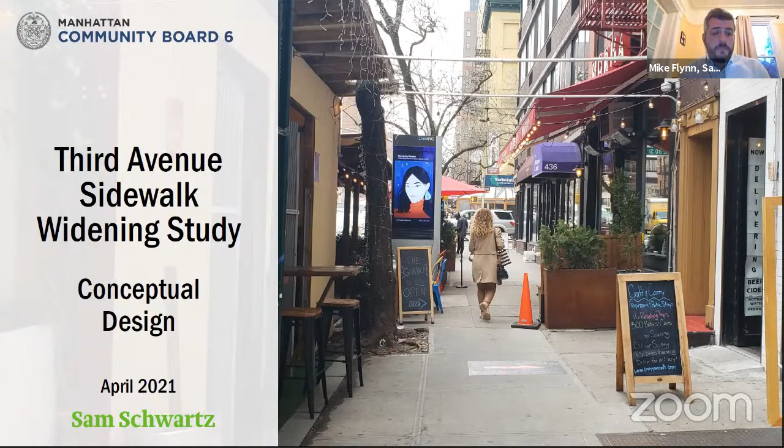Just as a quick introduction, my name is Mike Flynn. I'm a principal at Sam Schwartz and I lead our transportation planning work. Lian's a senior planner on our team and was the project manager for this, and I was the project director. We're excited to be supporting the community board with this study, and we definitely see a lot of potential on this section of 3rd Avenue.

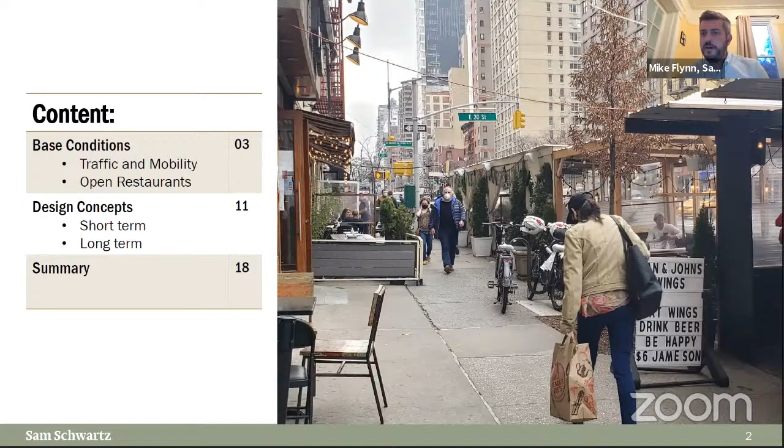So we're going to step through the existing conditions and then into some of the design concepts that we explored. At the end, we'll give a summary of all that. I just want to mention before I turn it over to Lian that the concepts we're presenting are preliminary. This wasn't a full scale traffic study, but we feel pretty confident in the ideas we're putting forward here for discussion based on the data that's out there. So I'll turn it over to Lian to walk us through it.

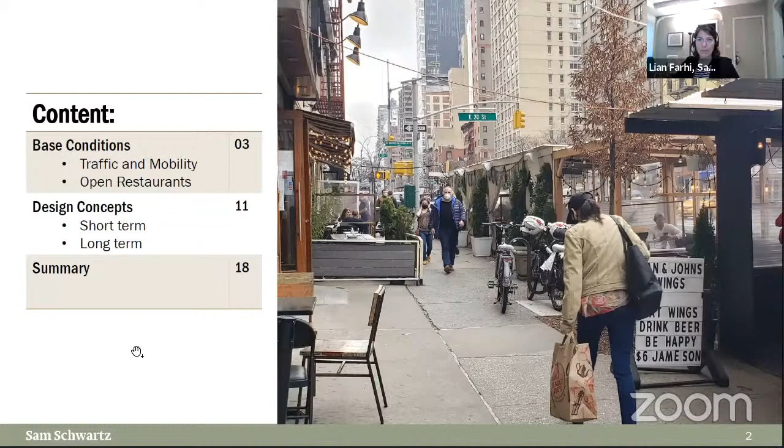Thank you, Mike. So I'm going to start with a base condition, and I'm sorry about the background noise, hope you can hear me well. We studied 26th to 32nd Street. We're looking at a right-of-way of 100 feet with a roadway width of 70 feet. I'm sure you're very familiar with the corridor.

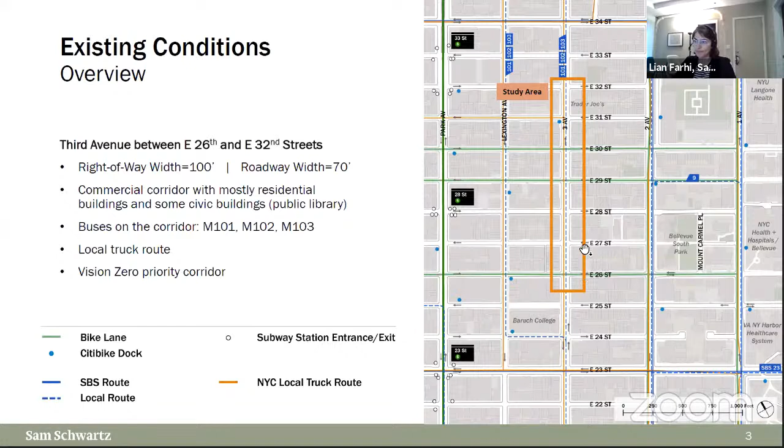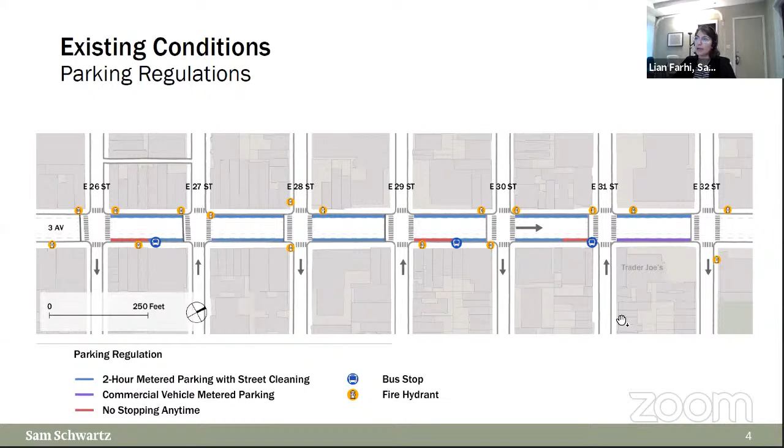This is a commercial corridor with mostly residential buildings and some civic buildings like the public library. The corridor sees 3 bus routes, and it's also a local truck route, designated as a Vision Zero priority corridor. In terms of parking regulation, most of the study area is 2-hour metered parking with some time for street cleaning. We have a commercial designation area next to the Trader Joe's, and we have areas that are no stopping anytime around the bus stops.

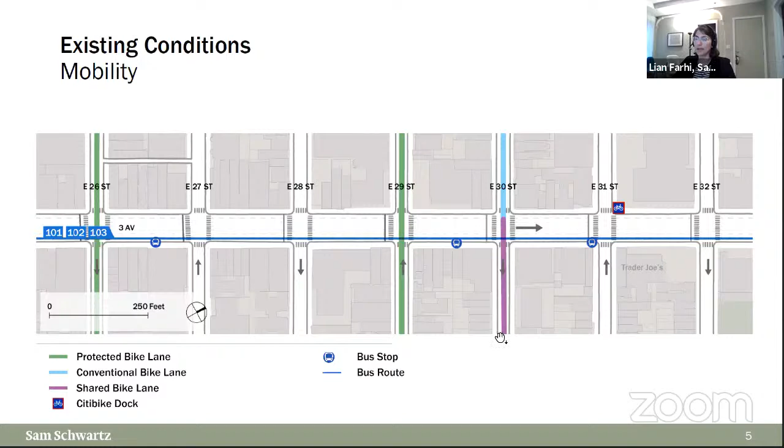We also have some crosstown protected bike lanes on 29th and 26th, the pair, and another bike lane on 30th Street. When we went out there back in March, we saw 23 restaurants and bars that are using the Open Restaurants program in this area between 26th and 28th, and then between 29th and 31st.

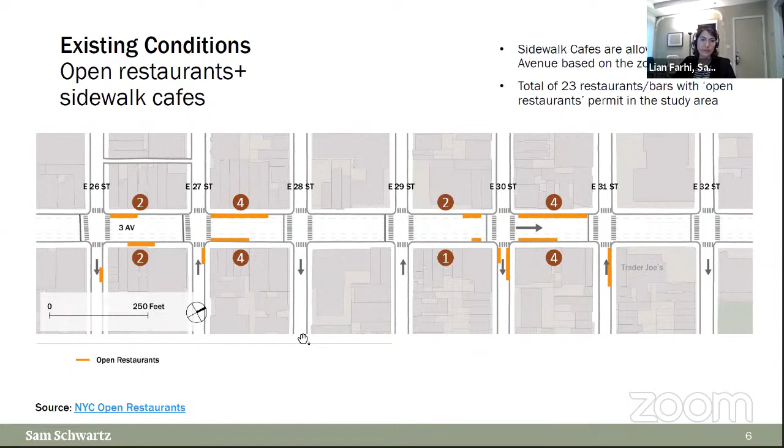I'll show you some photos of our site observation. I'm sure you've seen it on the site itself. We see it's been very popular. At some locations, we see some conflict points between the north-south movement of pedestrians that are walking and the east-west cross movement of the restaurants and bars. This suggests there might be a need for additional pedestrian space on this corridor and potential for expansion of this activity.

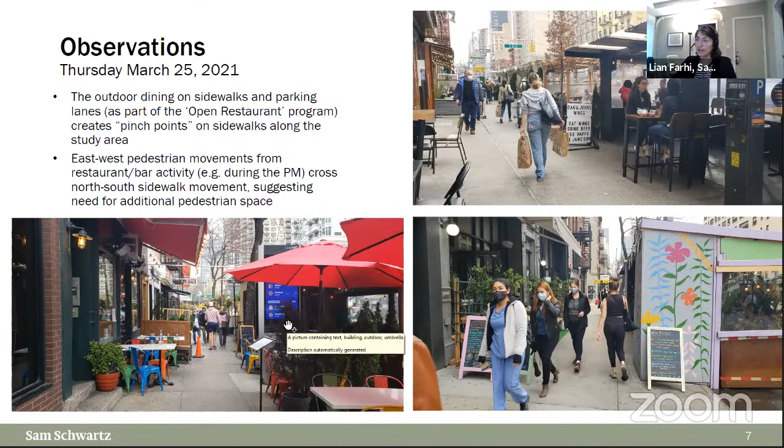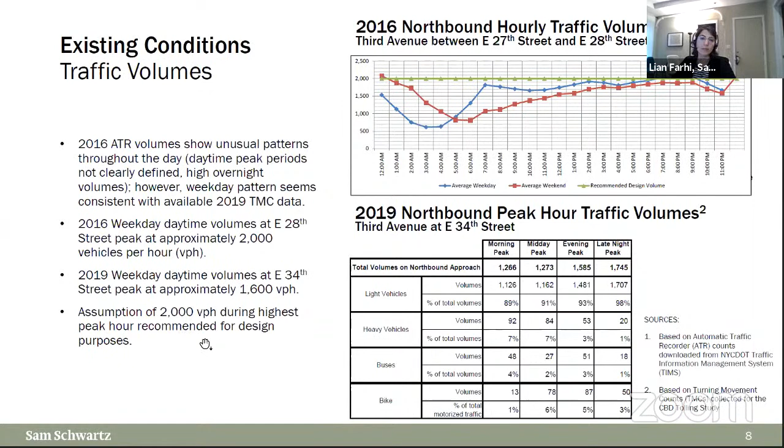We also looked at the available traffic data done by DOT in the past. Data from 2016 show the trend you can see here on the screen. It's a little non-conventional pattern of traffic that we see here, but around midday we see a peak of 2,000 vehicles per hour. Data from 2019 show slightly lower volumes, but we went with 2,000 vehicles per hour during the highest peak hour as the baseline for this design.

From the pedestrian volume information we have from 34th Street, a bit north of the corridor, we're seeing over 2,000 pedestrians on 3rd Avenue during the peak hour, which is in the PM.

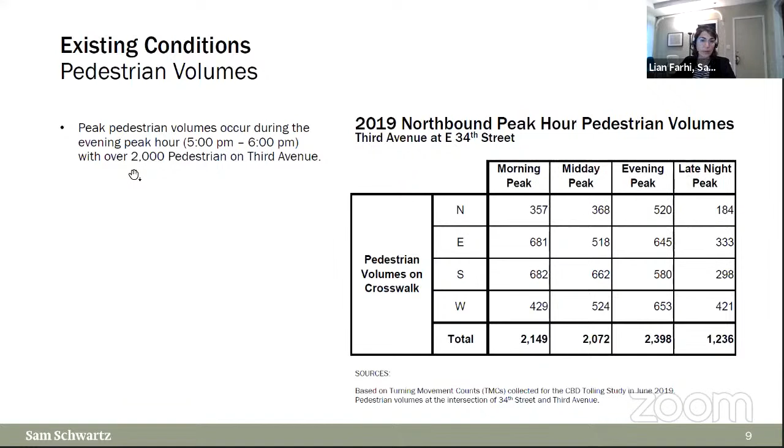With this information, we started to look at what are the potentials and what are some concepts that we can explore.

So this is the existing cross-section. You can see here sidewalks width of 15 feet, parking lane of 8 feet, and then 5 travel lanes of 10 feet. On this side, we have parking, loading, and bus stop of 12 feet, and another 15 feet on the east sidewalk.

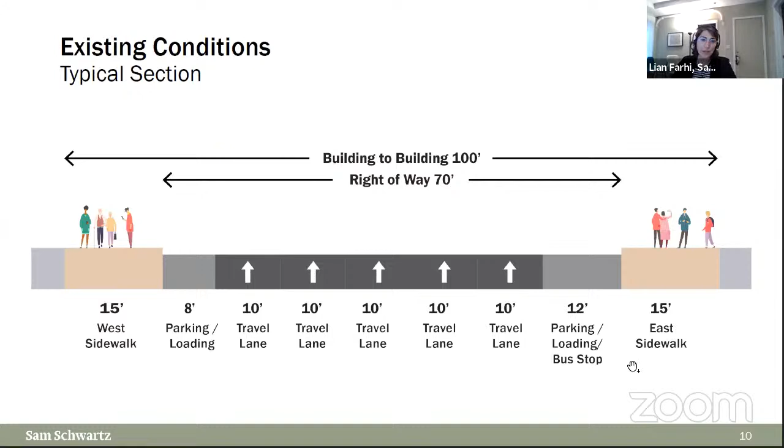I'm going to go through a few ideas, a few concepts, and let's start. So looking at long-term, what are we thinking? We see a potential for reducing the traffic travel lanes from 5 to 2 travel lanes, keeping 2 parking lanes, and on the east side to accommodate the buses.

We're introducing a protected bike lane. Here it's with a buffer. It could also be a raised bike lane design. And what we can gain from doing that is sidewalk widening of 10 feet on each side. So this is a long-term vision for the corridor.

Thinking short-term, and kind of taking what we have already on site and how to improve that, we're looking at sidewalk expansion of actually 13 feet on each side with, again, 2 moving lanes and 13 feet on the west side for a curb lane, a little wider to accommodate bikers, and 11 feet on the east side for the bus stops.

I want to show a conceptual plan for how it would work on a typical block. So I'll try to walk you through here. In purple, you see the area for the sidewalk expansion, and then you're going to see the parking lane, 2 moving lanes, another parking lane, and sidewalk expansion.

The idea would be that on the existing sidewalk, you'll have the opportunity to accommodate outdoor dining, a furniture zone, some more amenities for pedestrians. The circulation would be on the expansion of the sidewalk. We also added these mid-block ramps for accessibility and ADA.

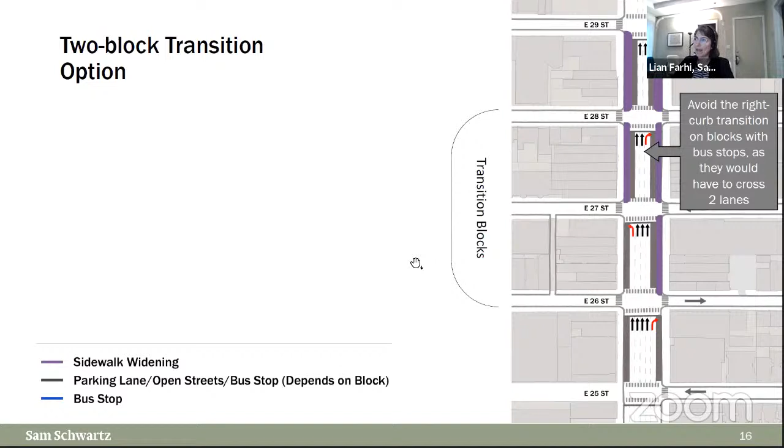We want to raise another option, which is actually starting this transition from 24th Street. The reasoning is that this block between 24th and 23rd is two-way traffic. We only have 3 northbound lanes here, so the transition is much smoother.

We also see a potential of connection to the new Baruch Plaza here. So it's combining the improvement on the plaza to a sidewalk widening and expansion of public space.

With that, I'm going to give it back to Mike.

Sure, so I'll summarize and then we're happy to answer some questions. I saw one question, or actually I see another one now as well, so we can answer. No, okay, sorry, I'm not sure what the format is. We'll call on committee members first, Mike, and then we'll deal with the stuff in the Q&A. Got it, okay, thank you.

Okay, so yeah, just to recap, this kind of worst case scenario, or peak volume of 2,000 vehicles, we feel can be accommodated in 2 travel lanes. You'd want to look a little closer at specific turning movements and things like that, whether maybe turn lanes might be needed at certain intersections. We also assume on projects like this, based on past experience, that if you reduce the capacity on a road, some of that traffic will divert to other routes or just kind of evaporate, basically.

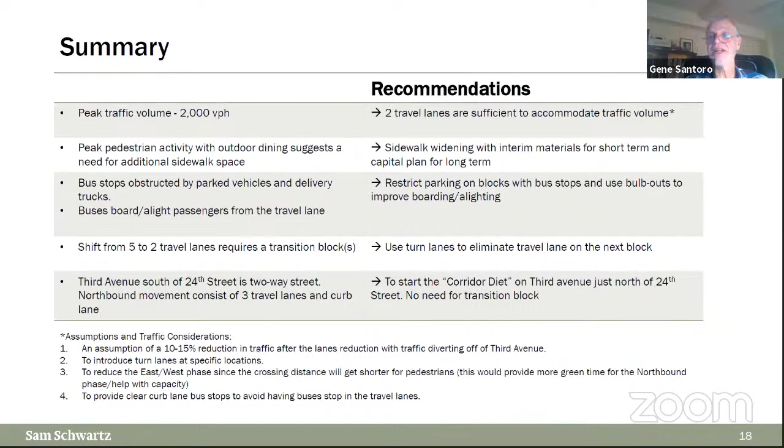Ronnie? Yes, good evening everyone. Just a quick comment and question. In general, I love this, this is fantastic, and it definitely should start from 24th Street. The traffic turning onto Third Avenue and coming up north on Third Avenue will be forced to slow down, and it gives the drivers, everyone, time to acclimate to the new street condition. More particularly, I like the conservative approach of starting from 24th Street as kind of like a hybrid. I think that would make more sense and be safer.

And my question is, is there any consideration to some sort of uniform lighting to further delineate the space at night and twilight? Because with the crazy different tea lights and this and that going on, it could be a distraction, and it all isn't properly lit. I think some sort of uniform lighting will help with safety and also help the drivers realize, oh, you're entering a different type of zone.

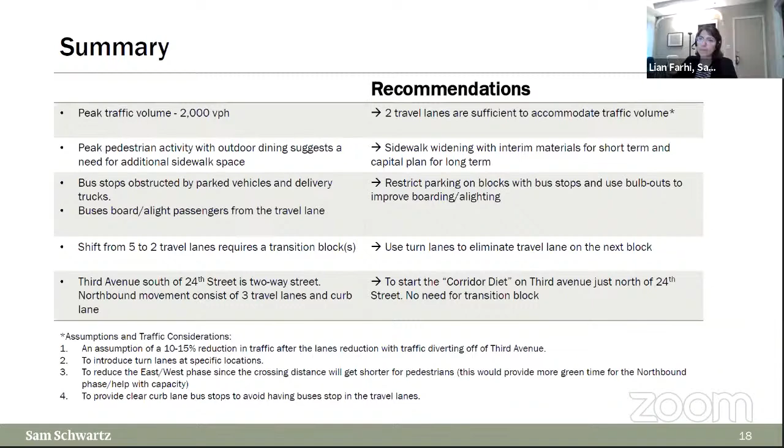We're putting the proposal for 2 lanes knowing that 2,000 cars could be accommodated in 2 lanes. We believe that by reducing it to 2 lanes, some of the traffic will be diverted to other corridors, and some of it will not exist on 3rd Avenue. Again, from the safety perspective, narrowing the road will help, and it will reduce the crossing distance. There is potential additional safety improvement that we could introduce as part of it, with curb extensions and things like that.

Yeah Mike, would you like to add? I think maybe the question was about the transition, how it would affect the transition. In other words, you're taking out three lanes of traffic, and how do you merge them and how do you do the transition?

It's really smart to do a transition from five lanes to two. So I'm looking at that to say, how will it really work with 2,000 cars?

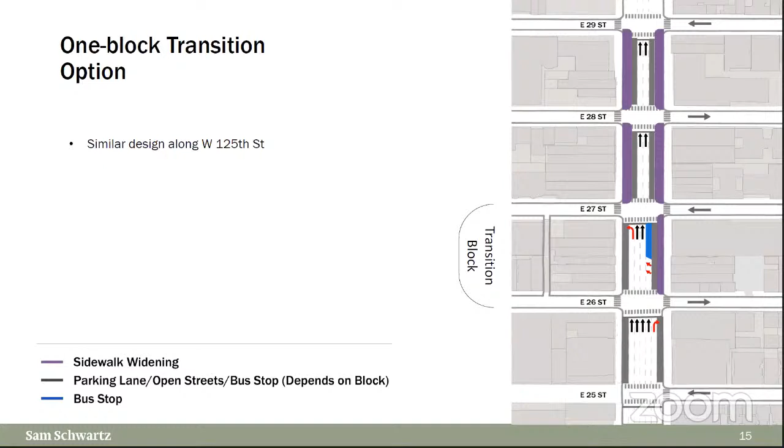Again, if you were to begin this a couple blocks further south, it would be a non-issue essentially. But if you don't, then what we're recommending is to basically have these turn lanes every block, so the outer lanes become turn lanes, and if you want to stay on 3rd Avenue, you would merge into the center lanes.

I think there are other locations where this happens, and it's something we're comfortable with. But if this were advanced into a detailed design, you could look at longer transitions. I think what we're proposing here, we're comfortable with.

So you're giving them escape clauses to get off Third Avenue by doing the turn. Right. Thank you. Okay, thank you.

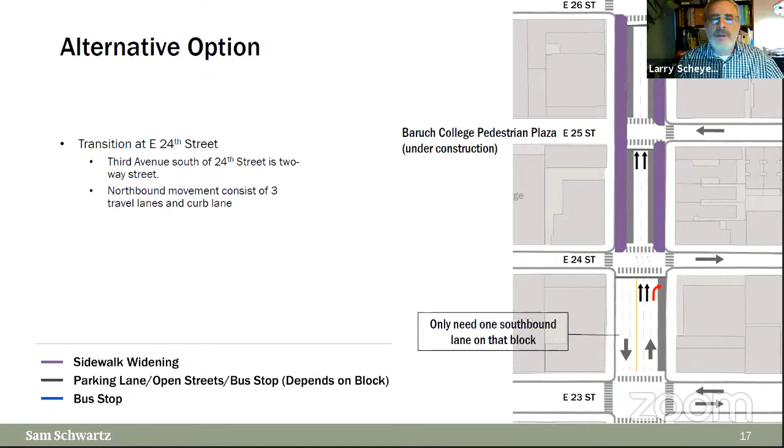Pull up the slide for the transition block between 24th and 25th Street. Here or this one? They're showing the lane design. The transition from 24th to 25th is here, with a concept plan. Yes, thank you. Can you push it over further to the left, so the map is more visible in the center? I can try. Let me.

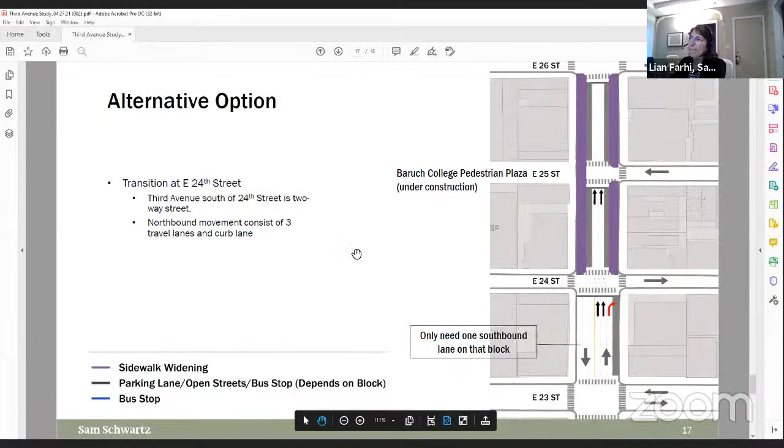That's great, okay. Thank you. As an alternative to this particular method of transition, we had considered in the past possibly making this block two-way, as it is in the block from 24th to 23rd Street. If that's done, this might also relieve traffic above 25th Street, because some of the traffic coming off of 25th Street could now go southbound, and this might be useful. Please consider that.

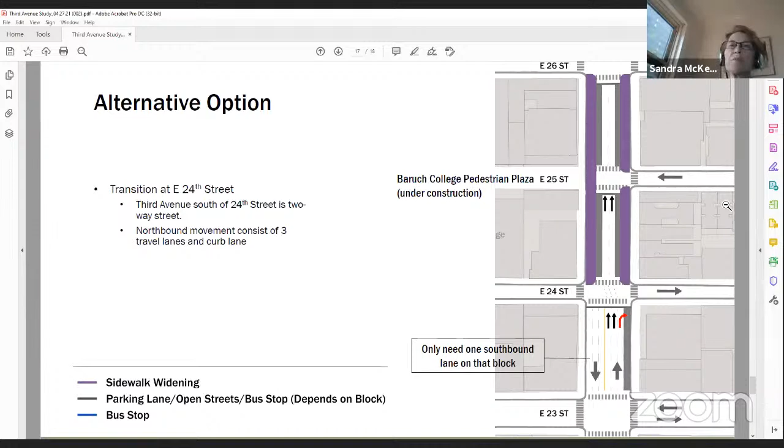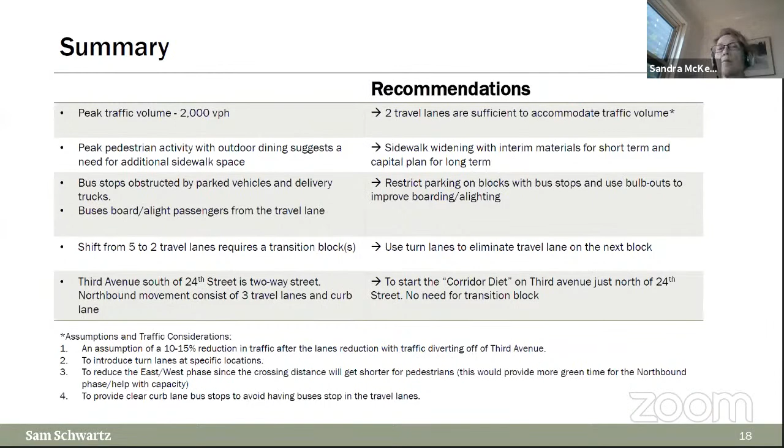All right, thanks Larry. Sandy, you're next. I think we would all agree that it's great to get more public space. I'm just wondering why you assume that pedestrians would go out into the street. Wouldn't it be better to put any of the temporary restaurant use elsewhere, so that we could still maintain that public quality to the existing sidewalk?

That's a great question. The reasoning for that was the maintenance consideration. The idea would be that DSNY would be responsible for the maintenance, and we need to have access to this area and keep it clear of obstacles. As soon as we're introducing street furniture here, that would require a heavier lift, which seems like at the current condition, there is no organization to take over. But the design could be changed if there is a different maintenance program in place.

Certainly as a bicyclist, I ride down the outside of a lot of these structures, and it's very unpleasant. So if our goal is to make a better experience for pedestrians, I highly recommend that we keep pedestrians on the sidewalk and utilize the street space for other things. I understand there are other programs DOT has, for instance Clean Curbs, taking over several parking spaces for garbage collection, bicycle parking. There's lots of ways we could use that additional space that might be more beneficial to our neighborhood.

Thank you. And in fact, Lian, let me add to Sandy's point, because that is actually one of the things we wanted. As you know, I know you changed it to this, but we were also interested in seeing the setup that Sandy described, because that was what we came to you with.

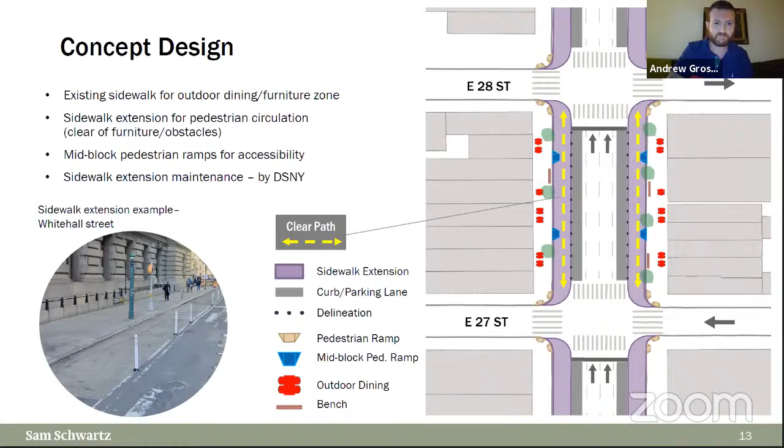Yeah, I think if this concept moves forward, I'm assuming there'll be discussions with DOT and those are kind of the trade-offs that can be evaluated.

Just to clarify one thing, we're not proposing a bus lane at this time. The bus volumes are not particularly high along this corridor. It doesn't seem to justify it, but that's based on our assessment.

Thank you, Mike, for that. Just to expand on that a little bit, remember that the reason we commissioned this and the reason we're using this is to give DOT a range of possibilities to get them to act sooner on this. We want this to happen quickly, or as quickly as possible, not in 2024. So we've jumped ahead and tried to flesh out options that they can then, obviously, when they look at this, they're going to do their own studies, their own traffic studies, their own assessments, and they'll come back with whatever they come back with. But we wanted to give them concrete options that we think are possible and that would work here, so they could have a jumping off point a little bit ahead of where they might otherwise be.

Okay, Ann, you're here, you have your hand up. I am, I'm here, and I am not in the car and not driving. Good, that's great for, I think, all of us. I actually have a bunch of really quick things. No, let's try to keep it down. Just time me at 2 minutes and I'll get through them all. Got it, 2 minutes, you're on.

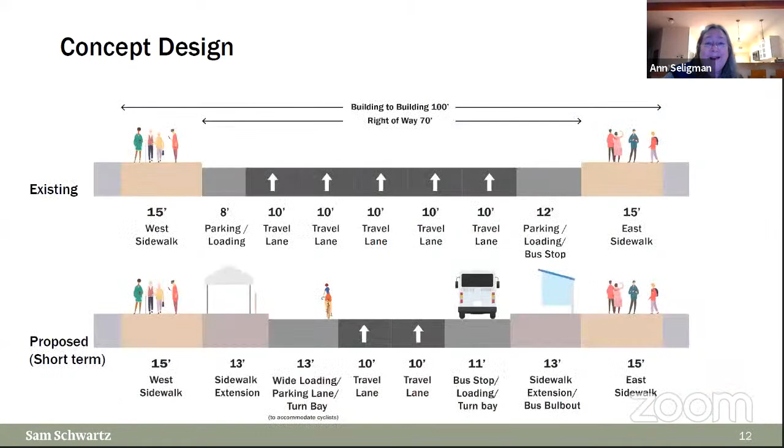And then really, I think the last thing is that this entire presentation is very symmetrical, east and west, and I think that the east and west sides of the street from a pedestrian perspective are very different, and if there's going to be another iteration, I'd like to see that considered. I love the 24th Street alternative - if we're going to go down to 2 lanes, that's the place to do it.

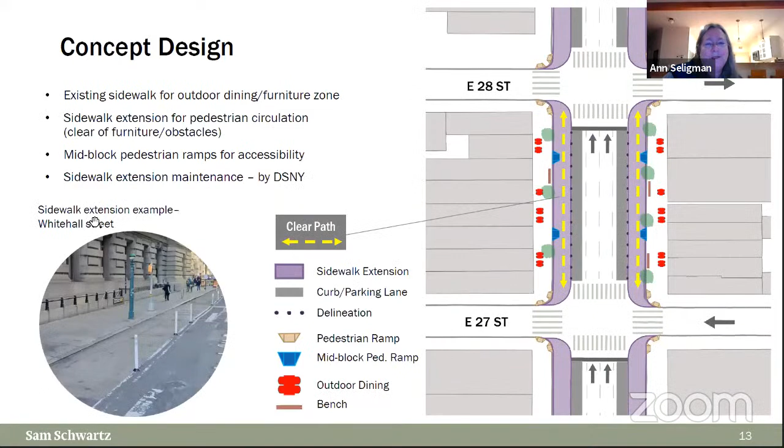I share Andrew's concerns about are 2 lanes enough? I am not sure I completely agree with your assumption, and I am not sure where you think that the traffic will be reduced by 10 to 15%, but I'm not sure where you think that will go.

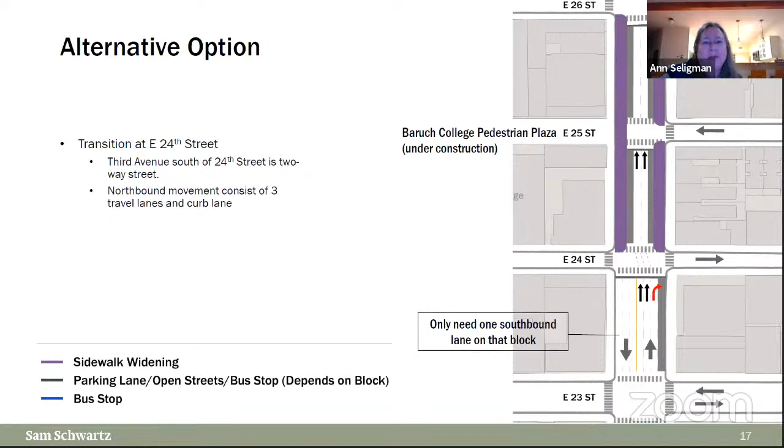That was good, 2 minutes. I was just about to raise your hand. Okay, there you go, well done. Let's see where we start.

Let's start with the easy win. So yes, bikers should be accommodated on this corridor, and we suggest a protected bike lane. For the long run and for the short term, we want to introduce a wider bike parking lane so they could use the west side and not conflict with the bus operations.

We're not looking at loss of parking. We are suggesting at some locations next to bus stops to not have direct parking in front of it, because that makes the bus movement harder when they're trying to navigate into their bus stops and out. So that's a location where we would consider changing the parking.

For the bus traffic, we haven't seen, as Mike said before, a need for a bus lane, but again, with a further traffic study that should be evaluated as well. And about the not symmetric design, again, these are things that we have observed in the afternoon.

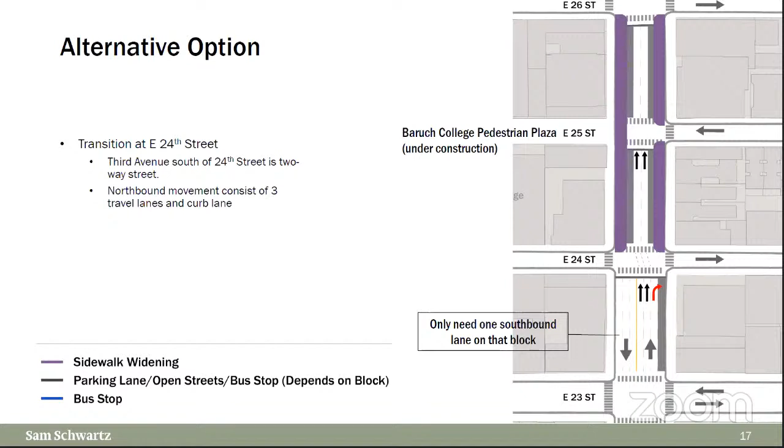I'm sure you know - sorry, just to clarify, I was not suggesting a bus lane. I was saying that there are more than 3 bus routes that use that, there are many express bus routes on that, so that needs to be incorporated. I'll look into that, thank you.

Yeah, I think I've addressed most of it. Mike, if you have anything else. No, I mean, I think we addressed the point about the traffic capacity also with one of the previous questions, that would need to be looked at closer.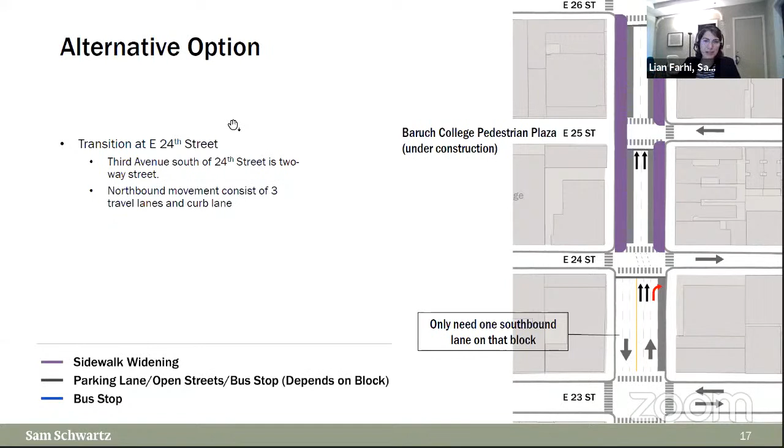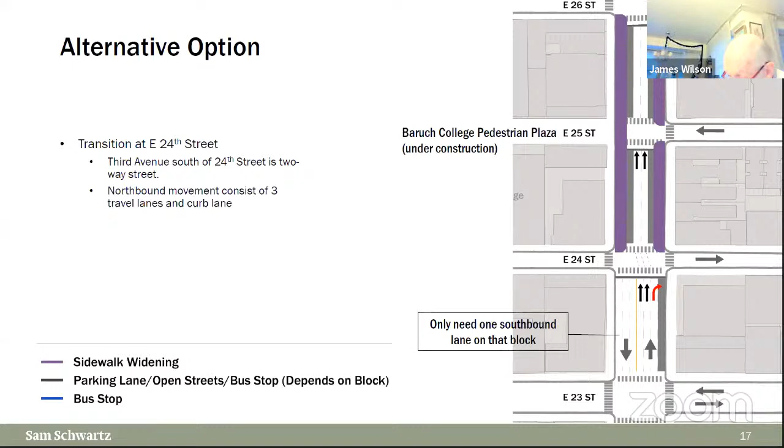My question is concerning the concept design on the proposed conservative line. In the area between 31st Street and 32nd Street, do you propose to expand the sidewalk there? Yes, the concept is for the full study area. Again, this block is a little different because of the operation of the Trader Joe's, but essentially that's the concept there as well.

So how much sidewalk would you actually add? On the conservative option, it's 9 feet of additional sidewalk widening, which gets you to 24 feet total. I see. Thank you. You're welcome.

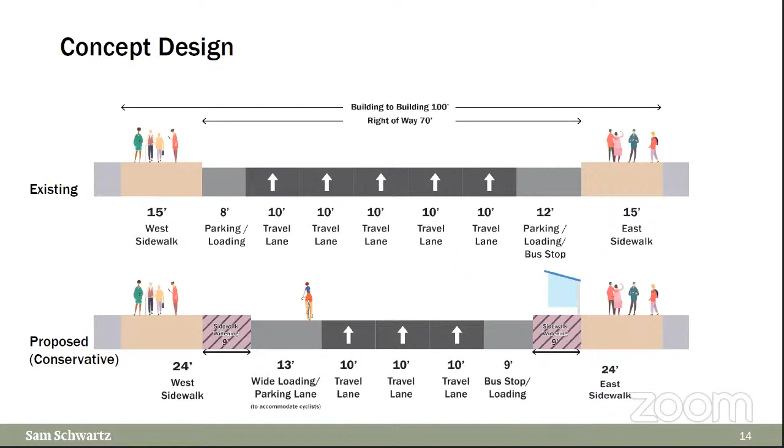Thanks, guys, for the presentation and the options. Are you aware if there are going to be any DOT projects along this corridor in the next few years that might interrupt your implementation at some point, whenever that might begin? And what about the existing construction? I know that's not your area, but how might future DOT projects impact your design?

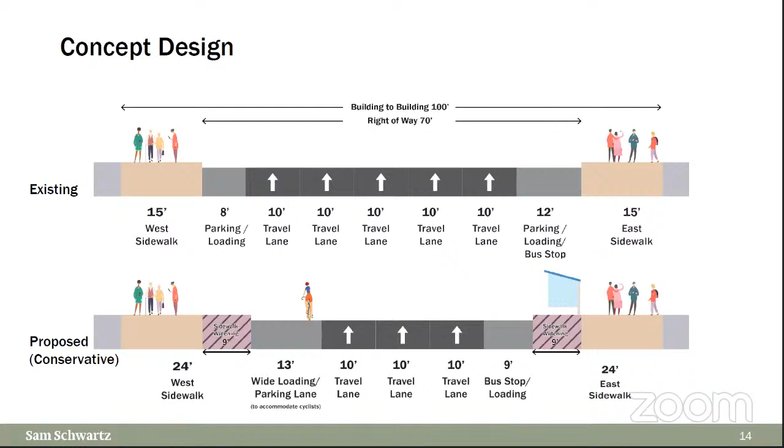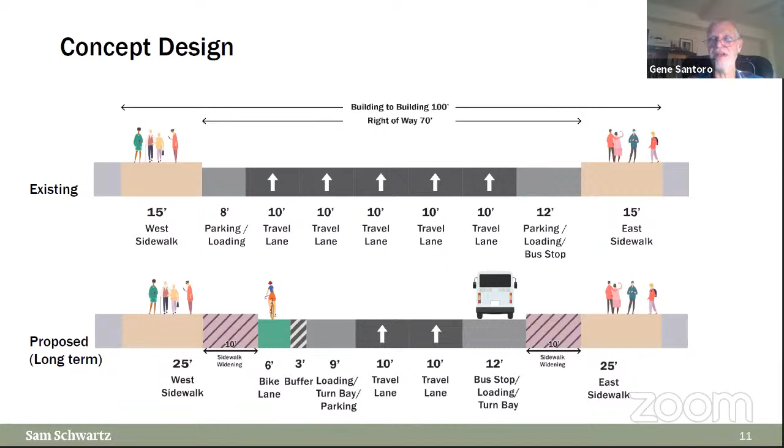I'm not sure anybody understands that question, Phil, exactly. We're planning for now. We're doing this, as you know, to urge DOT to consider redesigning this portion of the avenue along some of the lines we're suggesting, or something better that they come up with. What future projects they're planning 2 or 3 years down the road is something we don't have to worry about right now. They'll have to worry about integrating it with what's already been done here. So I'm not sure I understand the point of your question.

My point was, are we aware of any DOT projects along this street that might interfere with implementation? We don't have to go into what the future will yield, that's just the question. Is there anything perhaps across town, a bike lane, or additional construction where permits have already been filed that might obstruct this implementation over the next few years? I know it's a broad question, but right now there's a lot of construction on 3rd, and that would certainly block any implementation. So that was just my question, if they were aware of anything.

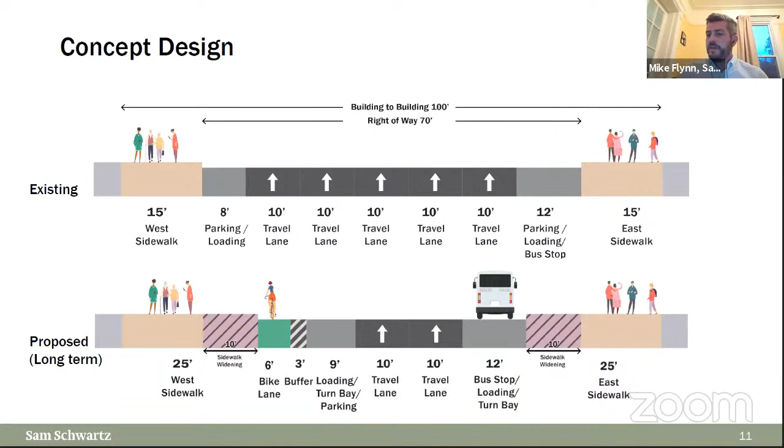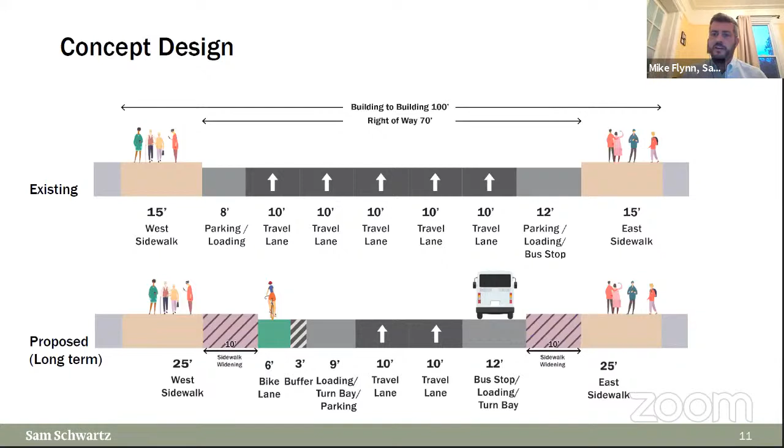I think the hope is that DOT would implement this, so they would coordinate internally amongst themselves to design it in a way that integrates with the other things they have planned. Sure. That would definitely be wise planning on their part. I'm sure they would consider all the projects they have slated.

The aim of tonight's presentation is to give an update about our proposed plans for the Queensboro Bridge, as well as the South Outer Roadway.

So in 2007, DOT began prioritizing design changes that improve cyclist connections to the East River bridges, as well as making improvements on the bridge structures themselves. Specific to the Queensboro Bridge, DOT focused on providing protected connections.

First on First and Second Avenues in the 20-teens. In 2019, we closed a critical gap where the upper roadway touches down between 60th and 59th on Second Ave. And this past summer, as a response to COVID, we installed temporary lanes on 61st and 62nd to improve connections between the park and the bridge.

In Queens, we've also made similar progress, improving bicycle connections on Crescent Street and installing another temporary bike lane on Northern between 41st Ave and Broadway.

Bicycle volumes on all East River bridges continue to go up. In the last 5 years, we've seen nearly a 15% increase. And during COVID, on all East River bridges, we saw nearly a 30% increase. Specific to the Queensboro Bridge, we saw a 45% increase.

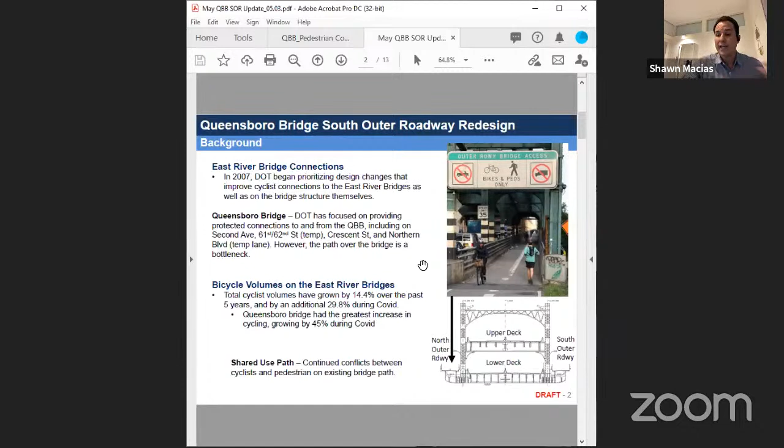So the North Outer Roadway is at capacity. During COVID, we really saw that it was being stretched to its limit. And we've begun to investigate how to expand access and continue to allow this asset to meet the demand for pedestrians and bike volumes.

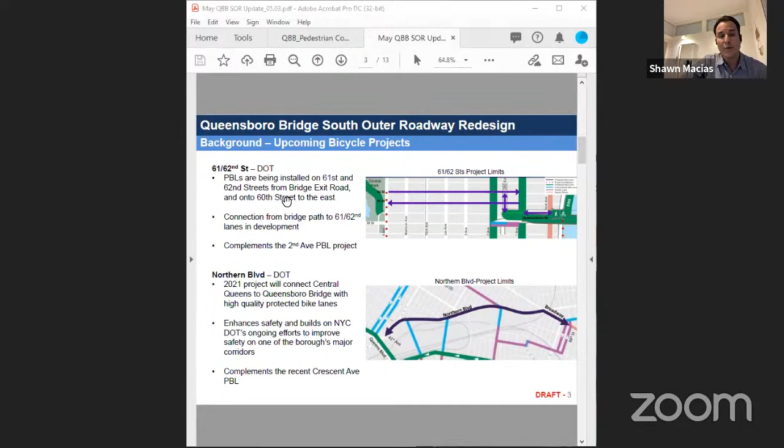As I just mentioned, we did start 2 projects, one in Manhattan and one in Northern, the temporary bike lane projects I referenced. So this is just to let everyone know, and I'm sure this group is aware, that we plan to come back and install 61st and 62nd with more permanent materials using green paint, thermoplastic, and vertical elements, and the same for Northern to continue to strengthen those connections to this bridge.

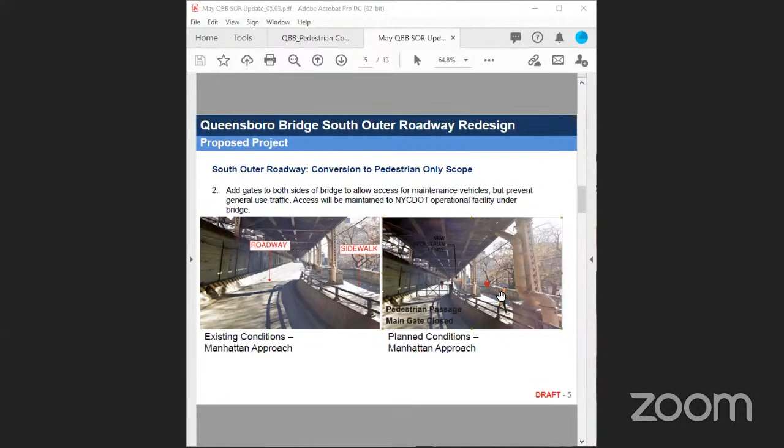So as you can see here, there's the sidewalk on the right and the roadway to the left. Pedestrians would access the South Outer Roadway using the existing wide sidewalk that loops around Honey Locust Park, where the sidewalk and the outer roadway are at the same grade. We'd remove a couple Jersey barriers, and pedestrians can access the space seamlessly there.

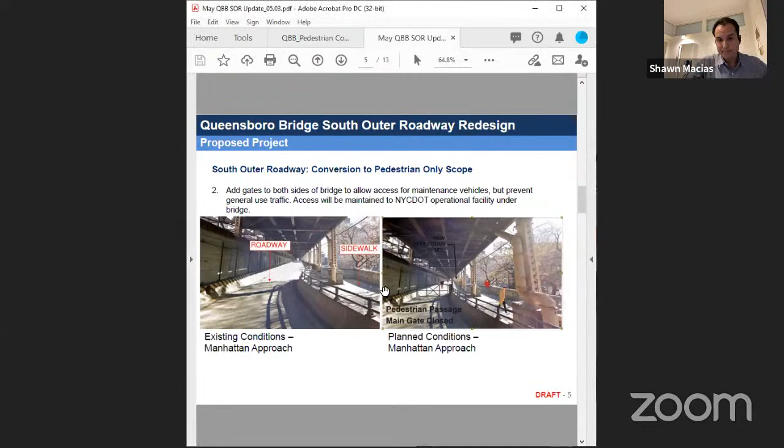As part of the conversion to pedestrian-only facility, DOT plans to make upgrades to the existing streetscape where the path touches down on each side of the bridge. In Manhattan, that's near 59th and 1st. On the Queens side, that's Crescent Street and Queens Plaza South.

Those designs will follow our traditional SIP process, so once they're developed, we bring them to spaces like this for community input. Updates to wayfinding and signage will reinforce that the North Outer Roadway should be bikes only. We'll make similar upgrades to the South Outer Roadway, but in the inverse, denoting that it is pedestrian only. A traffic study to determine additional supportive changes to the traffic pattern on the bridge or on the bridge approaches, to minimize traffic disruptions, will also be undertaken and coordinated with the MTA CBD tolling program.

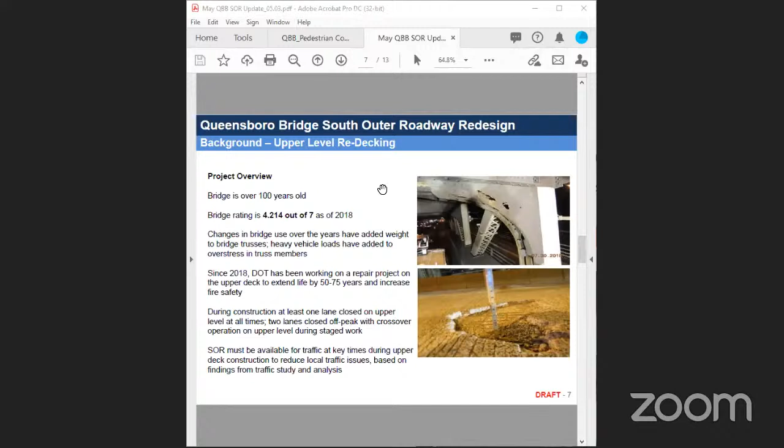So here I'd like to provide just a little bit more information on the ongoing redecking bridge work that influences the timing of the improvements of the South Outer Roadway. For those who don't know, the bridge is over 100 years old, and the bridge rating is currently 4.2 out of 7, as of 2018. Changes in bridge use over the years have added to the weight of the bridge trusses. Heavy vehicle loads have also added to the stress on these truss members.

Since 2018, DOT has been working on a repair project on the upper deck to extend the life of the bridge by 50 to 75 years, as well as increase fire safety. During the redecking construction, at least one lane must be closed on the upper level at all times. During off-peak hours, 2 lanes are closed, in order to facilitate access to the surface to make the necessary improvements.

Because of the construction, the South Outer Roadway must be left available for traffic at key times during upper deck construction to reduce local traffic issues. Those findings are based on traffic studies and analyses.

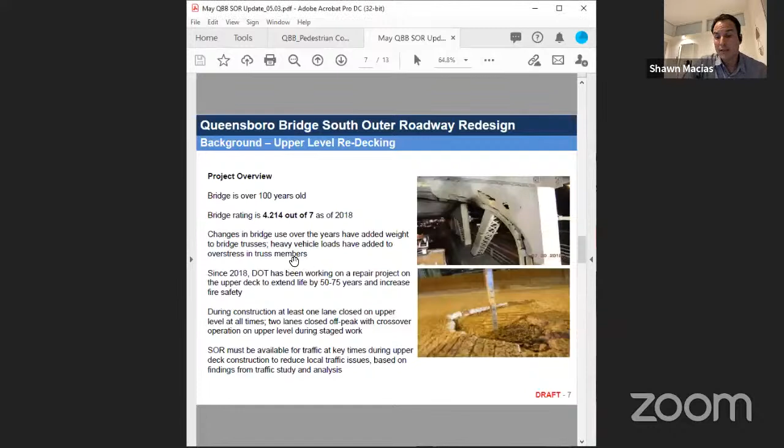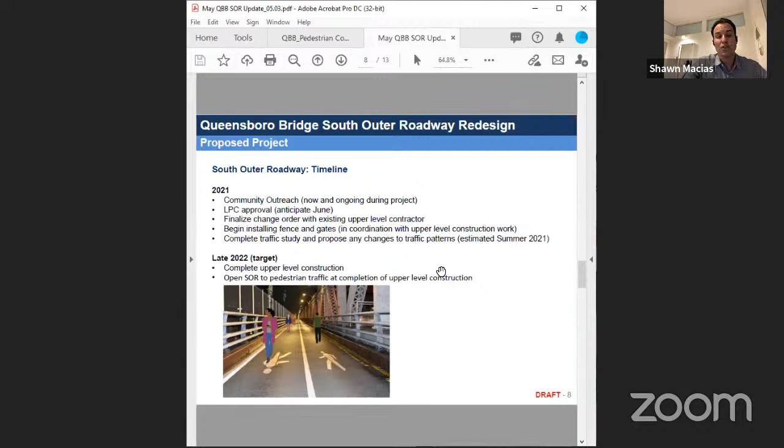And with that, I'll turn it back to Eugene or the committee for questions. Great, thanks, Shawn. Okay.

Okay, I'm seeing Ann and then Larry. Ann, you're on.

Hey, I'm going to raise a question that I think I raised the first time this was discussed, which is this sort of awkward timing between, I think it's 6:30 a.m. and 10 a.m., when the upper roadway is inbound only, so that people coming up First Avenue use that, like that's the best way to get onto the outer roadway. And now, you know, with this change, which I think is a great change, what they will end up doing is either adding to the crush on 3rd Avenue and 59th Street, or they'll go back across to 61st Street and go west on 61st Street and kind of make the loop around where they are mixing with that. And I think there was a reference to a traffic study that would have to happen to understand the implications of this. That I think would be like just a really, really key element of that.

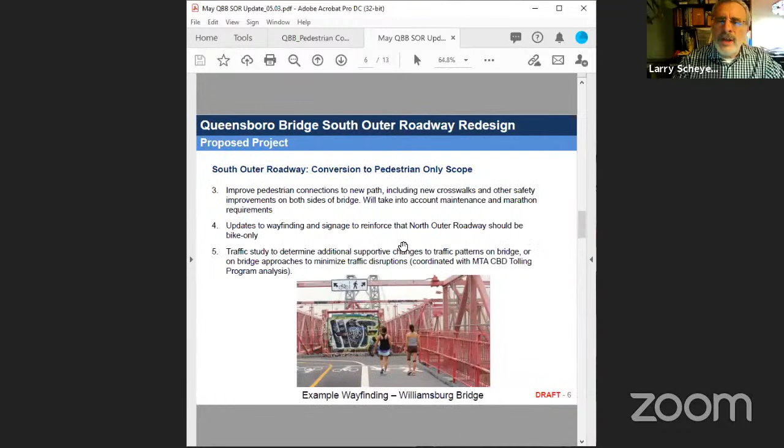Well, I share with Ann the observation that this is a great shortcut that would be lost. And that's all I have to say about that. My question has to do with the fencing. Is there any way to design fencing so that it might be possible as a pedestrian to take photographs of this beautiful view off the bridge without having chicken wire in the way of the photographs? If you've got some kind of plexiglass or some means of creating photographic spots for pedestrians who might be able to enjoy the view, this would be worth considering.

This is Jonine from DOT Bridges, and Nick Pedinati, my colleague from our Urban Design Division, is also on the call. He can speak to the PDC design, but we did spend probably 6 or 7 years examining potential alternatives to chain link fencing, and there are a number of reasons we landed back on chain link fencing. It is in the New York State Bridge Design Manual, which governs essentially all of our bridge design, but it also provides us the opportunity to maintain the bridge in a way that Deputy Assistant Commissioner Schwartz, who's on the call today, his forces have to be able to maintain 24/7, 365. It's a material we stock, we can get readily, it's the least expensive material. Upwards of 7,000 feet of fence has to be installed. And this is the fence we've decided also discourages, unfortunately, people from dropping things and throwing things off the bridge, which has become an increasing problem, as well as a suicide concern.

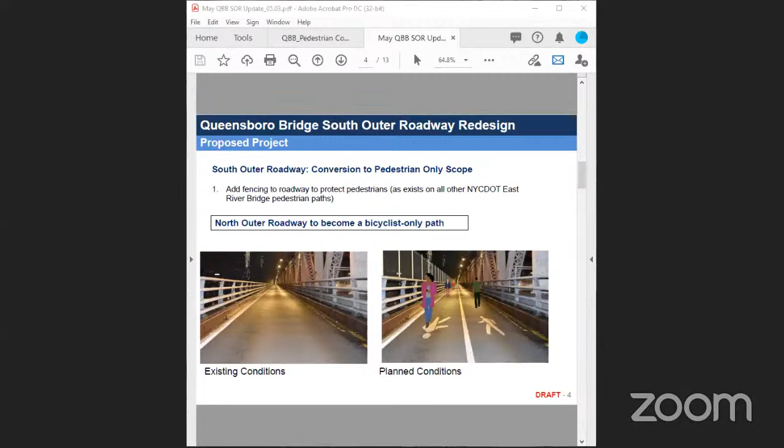Is there a problem with people attaching locks to the fencing? Thankfully, the public's interest in love locks has somewhat diminished. It was not as big an issue for this bridge, but it was a very serious issue for the Brooklyn Bridge. We actually do have periods of time where Commissioner Schwartz's team have to go out. Picture a very big tractor trailer with the roof cut off, and the lock nipper guys go across the bridge, and the locks drop down into the open truck. Then it's our responsibility to dispose of them, and there are thousands of locks that we do have to remove from the bridge. There are not many here, and we hope the general public has kind of forgotten about that practice.

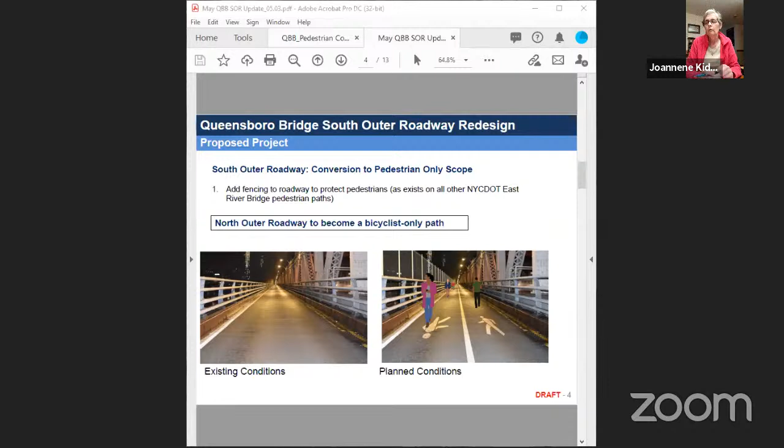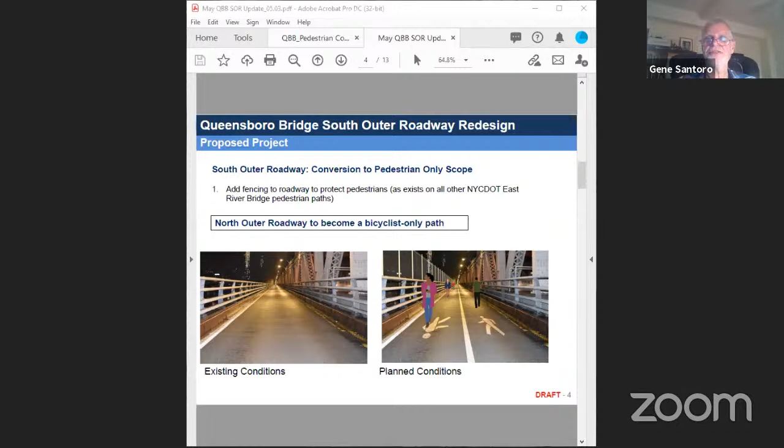Okay, I'm not seeing any other questions right now. But before I let you go, let me duly note that Ed Pincar is here. We don't often have the Manhattan DOT Commissioner in our meetings, but shout out to Ed. Thanks for coming. Of course, thanks for having me. Hope you enjoyed the show. Yeah, thanks, Ed.

We also had Pedro Carrillo, Chief of Staff for Carlina Rivera, here for the Third Avenue presentation, who wanted to state for the record - he's going to type it into the Q&A before he goes - that he was aware some of you may have seen the Streetsblog article about transportation alternatives plans for Third Avenue that came out about a week ago. Pedro wanted to note that we were there firstest with the mostest, and that in answer to some of the questions that arose during that section, congestion pricing is coming on. So some of these traffic levels people are speculating about - traffic's already back up to 90 to 95% of its 2019 levels anyway - but some of the traffic levels people are speculating about will be cut down by congestion pricing when that comes in. So those are other ways to think about it.

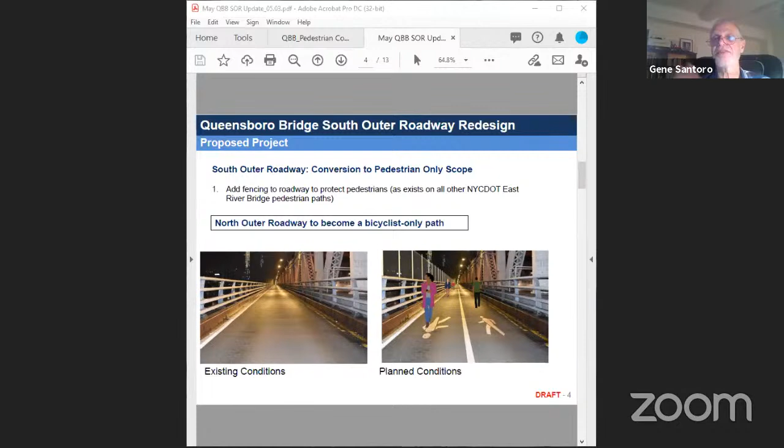Again, thank you, Ed. Thank you, DOT folks, for sharing. We look forward to the more fleshed out iteration of this next time around, because it's an interesting start. Between us and the various other people you'll be seeing in the next few days, I'm sure you'll have a bushel load of responses you'll have to figure out how to deal with. So look forward to seeing what that is over the summer.

You think that is going to be September? What's your guess, Ed? I think we'll definitely look to have an update later this fall, and obviously as we work towards implementation, hopefully in 2022, more conversations. But we're making good progress, and we'll be in touch. Okay, great. Thank you. Thanks for having us. Thank you. Thanks for coming. Thanks, everyone.

Okay, and there's Patrick, long-suffering, quiet, laughing. Item 3 on the agenda. Not too bad - it could have been 8:45, Patrick. You're gesticulating great, but I can't hear you because your mic's not on. All right, we're - oh, I'm sorry. I was flipping back and forth. I said, no, it's nice to be here and nice to hear all that. Great stuff, Third Avenue. I mean, oops, what happened?

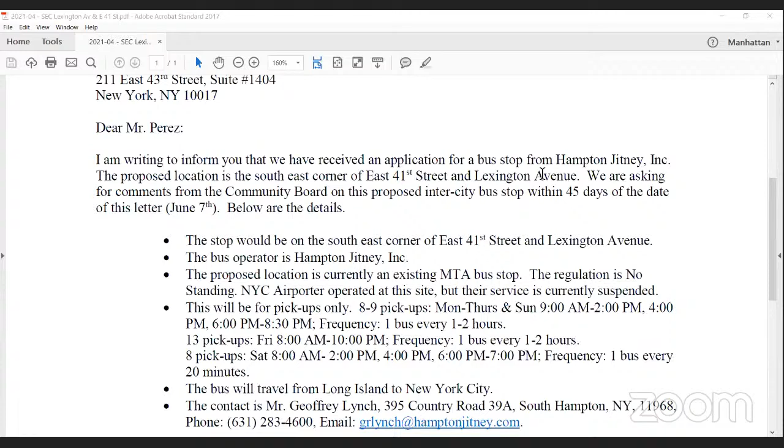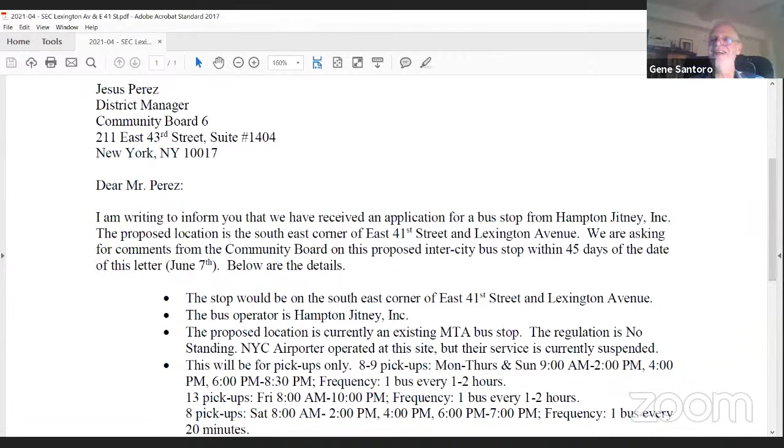Okay, here we go. This is Brian, the minutes taker. Patrick, I know who you are, so thank you for joining us. But I do have a real question, a quick question for the chair. Did we vote? Oh, now? I'm sorry. Thank you, Brian. No, we need a - yeah, he thinks you moved the agenda too quick. I skipped right over one of the key parts of the agenda, which is, yes, we do need to have a reso on this.

And everybody was - wait, I'm sorry, there's a reso on the bridge? The bridge, yes, the bridge is a reso required. I have the vote part of the minutes all set up already. I moved to have a vote on that part. Colleen, that's correct, right? That's what you said this morning when I asked you. Yeah, that's correct, Gene. It's good to have a resolution on file from the community board. We'd recommend one. Okay, well then I guess we'll do one.

Okay, because it is a sketchy presentation, so I know we're voting on sort of the idea of this rather than the actual details of it. Yeah, I'm a little hesitant. I mean, you laid out such a detailed picture of what we were going to do this month and what required resos and what didn't, and it was not clear to me - I might have listened to the entire discussion a little bit differently had I thought that there was going to be a reso.

This is Brian, I'm going to raise my hand. Yeah, sure, go ahead Brian.

I make a motion to create a resolution in support of the proposed proposal from DOT about the Queensboro Bridge, North Outer Roadway and South Outer Roadway.

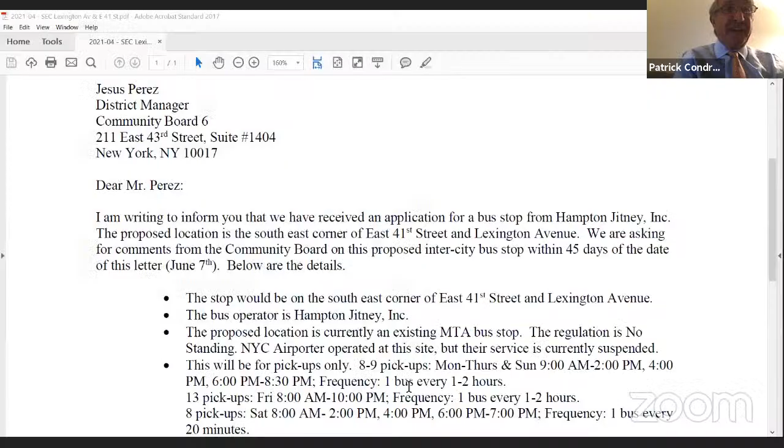I didn't know my microphone was off. That we had Ed Pincar and others on, and it was great. Yes, I was agreeing with you when I was saying—so thank you for having me here tonight, and I'll be quick. I think Brendan, thank you.

Is it Colleen—do you want to start with this letter, or do you want me to start? Gene, you—I see this letter. You're fine, you do it. It describes it. Yeah, so I'll make my commentary on this letter.

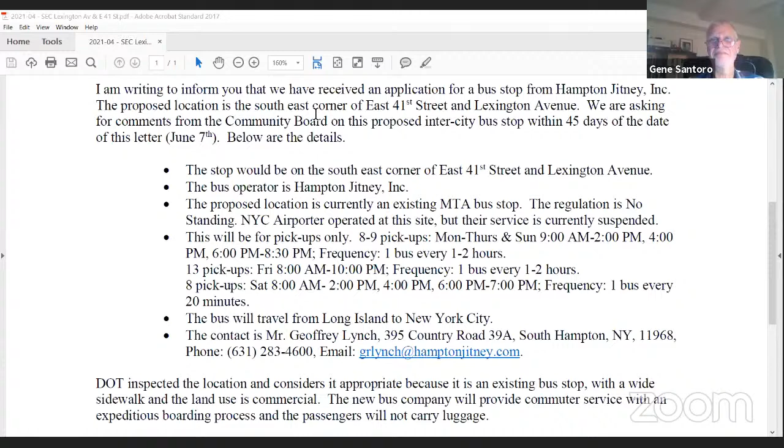Is that okay? So I'll open up with the fact that, as you know, Hampton Jitney has been operating continuous daily service and commuter service between New York City and the east end of Long Island since 1974. It currently operates 365 days a year and has for many years contributed to the National Transit Database in public transportation commuter services. However, it does not—I repeat, does not—participate in the STOA, State Transit Operating Assistance Programs.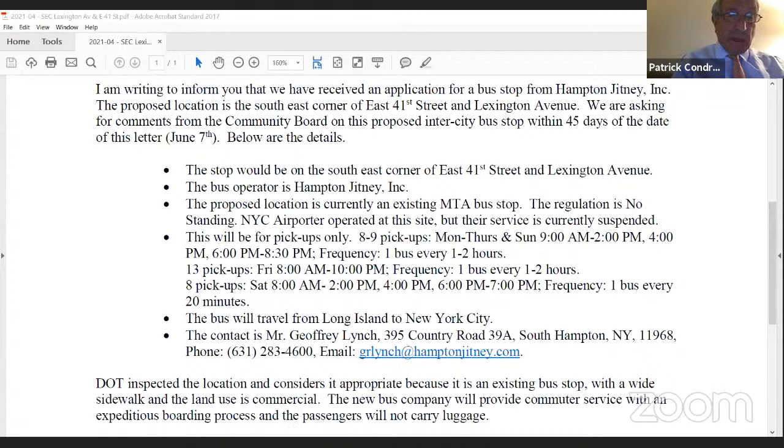And to spread the load a little bit, it's the smallest piece of the service. Most of the service goes to the South Fork. Most of the ridership comes from north of East 40th and 41st Street. The East 41st Street stop originally was, or 44th was originally Sunrise Coach prior to the acquisition, again in the 1990s, when Hampton Jitney took over Sunrise Coach.

So the services we're proposing would include currently about 8 buses a day, only pickups, no drop-offs. I think it's stated here Monday to Thursday and Sunday, 9 a.m. to 2 p.m. Frequency every 1 or 2 hours.

Majority of the people are getting up on north, up Lexington from 86th, 68th, and other locations, 82nd, further up. We do not expect this to be a traffic problem. In the reverse, it improves traffic flow. It takes buses off Lex, and it's a quick stop on its way close to the tunnel outbound, and it provides an efficiency of service for the management.

Dispatchers can go between 40th and 41st Street as opposed to running back and forth to 44th. So it provides an integral service and an intermodal program to Grand Central as well, from Grand Central as well.

Based on that, we also have been in touch with the locals and put up notice that we were talking to you. And I'm here this evening to ask for your support of this. On behalf of Mr. Lynch, we thank you. And we have been and continue to be in service every day for the riding public on the east side to Long Island.

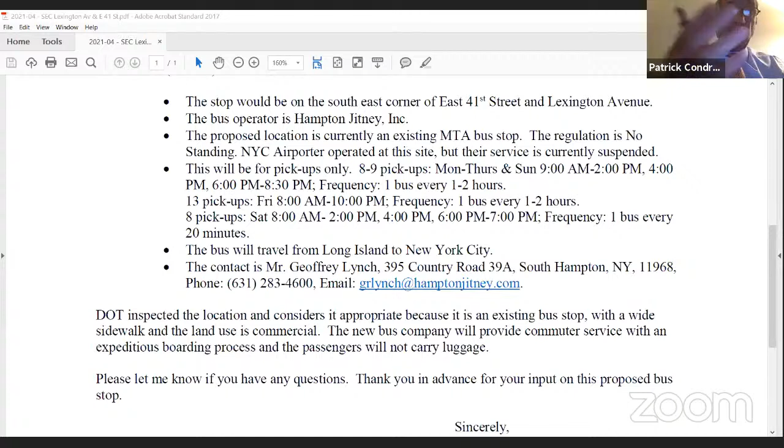I thank you. If there's any questions, I'm here tonight. Colleen is, I think, on board too tonight. Is that right? She is.

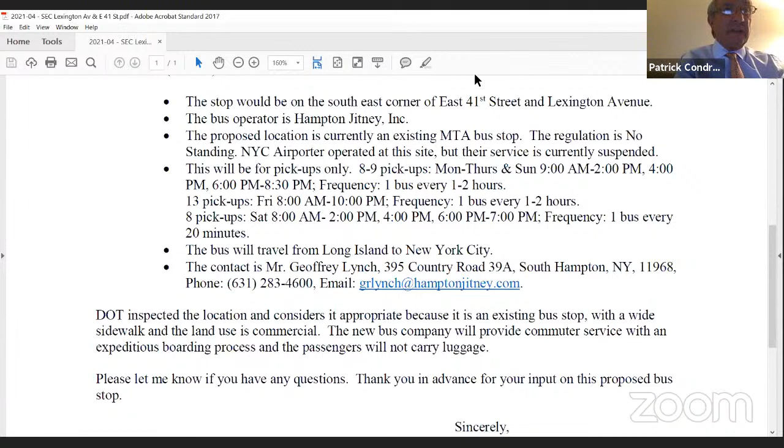Yes, we're in support of this location. Okay. Did I do anything, Colleen, on my commentary? Patrick, you did excellent. Okay. So, I'm a fast-talking boy from Brooklyn. We're ready to roll. We're ready to roll.

We actually have a question. Hold on. So I saw Ann's hand up. Sure. Yes, I got there before somebody called to question. And my question is not actually about this, but I'm just curious what you guys think.

You probably are one of those bus services that goes up 3rd Avenue. And I'm wondering what you think about the presentation that you sat through to hear this, about what that will do for you guys. I made my notes about this for Mr. Lynch. My background, by the way, is lifelong here in the bus industry. I owned and operated one of the franchise bus companies.

I recognize that a fundamental is traffic flow is important, but I noticed the reduction of 5 lanes to 3. Speaking as Hampton Jitney, and I will inform Mr. Lynch, we have minimal impact because the majority of our passenger service comes from the north of 40th and 41st. So we will not be coming up 3rd. And on the inbound from Long Island, we again come out of the tunnel and north of 40th and 41st.